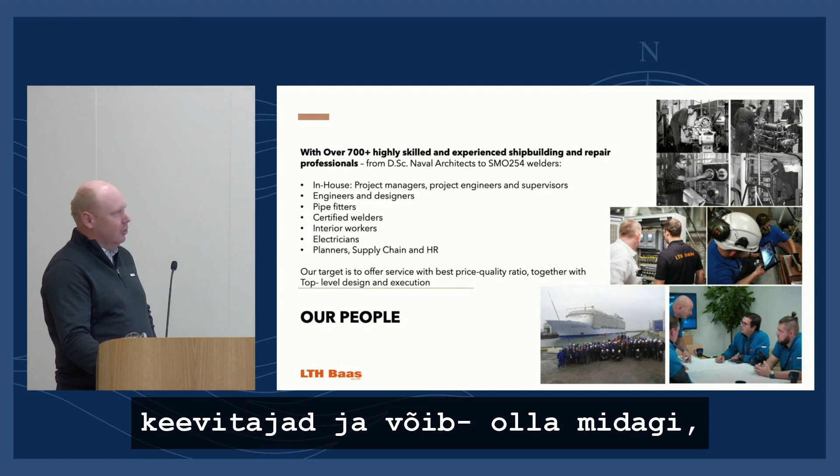So who are our people? Today we have approximately 700 workers, including office team and onboard installation team. We have our own engineering department, procurement department, logistics department, HR department, and of course project management department, including project managers and supervisors, plus our own workers: pipe fitters, electricians, steel fitters, welders. Maybe something that makes LTH a little bit unique in this business is that we are mainly using our own workers, so all these, let's say, 700 people, especially hard worker people like welders and pipe fitters, they are on LTH payroll.

But of course, sometimes we need very specific skills. As an example, sometimes we need divers to do some underwater works. Then we hire this company. We have a very good relationship with one of the Estonian diving companies who have helped us actually worldwide. We have used their services in Malta, Barcelona, Norway, Italy. So everything is actually possible, and there is very high competence in Estonia regarding diving works.

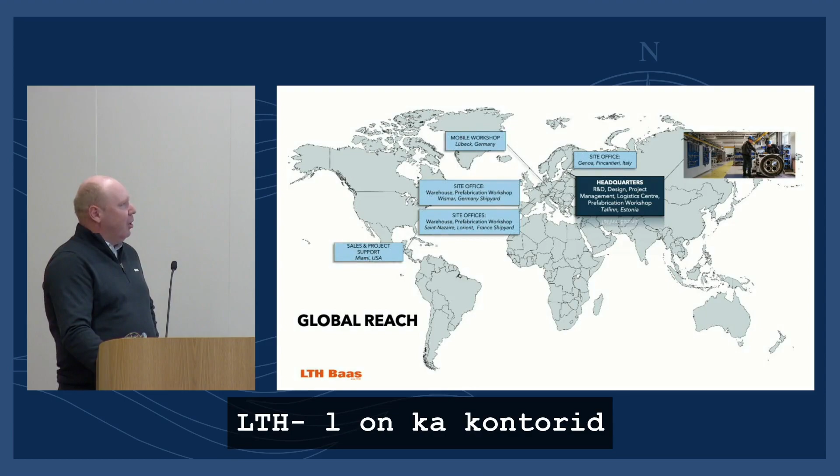LTH headquarters is located in Tallinn, where we have our R&D, design, project management team, logistics center, and also we are mainly using a workshop located in Estonia for the steel works. Plus, LTH also has site offices, mainly in Europe, in the biggest shipbuilding yards in Germany and also in Italy, as you can see on this slide. And also we have sales and project support located in Miami, in the US.

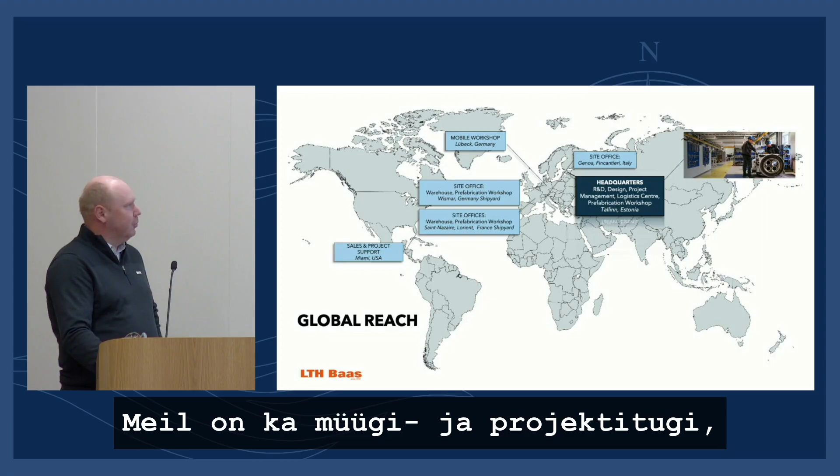We have participated in dry docking operations worldwide: Asia, Europe, North America. Plus, we are doing projects worldwide in operation, and actually this is the main field, or let's say the main activity that LTH is doing - projects in operation, when the ship is operating at sea.

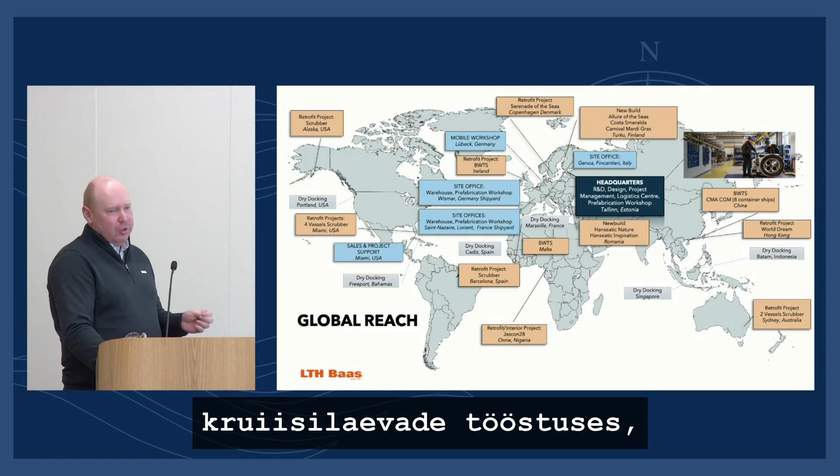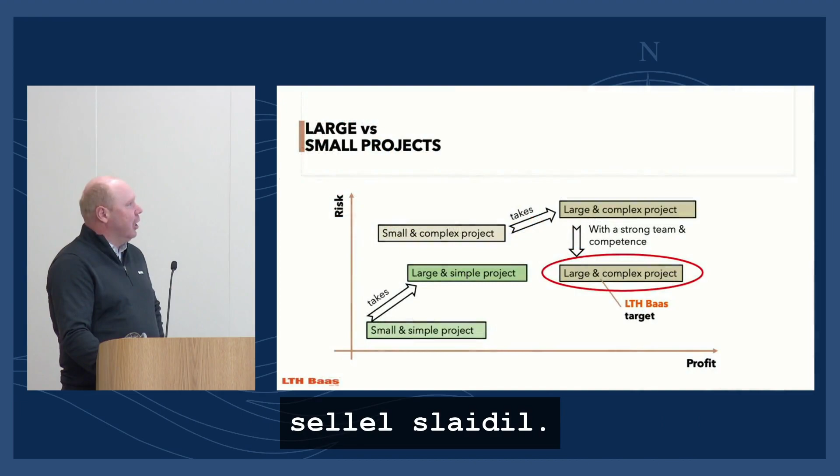So what kind of projects is LTH involved in? I have divided the projects between small and large, plus simple projects, and also between small, large, and complex projects. So what's the difference? The difference is that there is a risk and profit, you can see this axis.

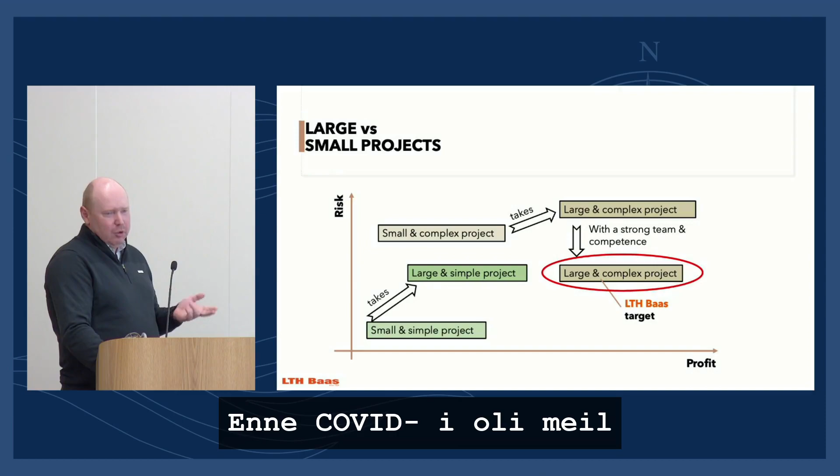When we are talking about small but simple projects, then actually these are not very interesting for LTH, because LTH is a very big company - 700 plus workers, and this number is again increasing. Before COVID we had 1,200 workers, but because of COVID this number dropped. But now we are also growing fast, and let's say our organization is maybe too big - I mean the management is just too big to do the small projects.

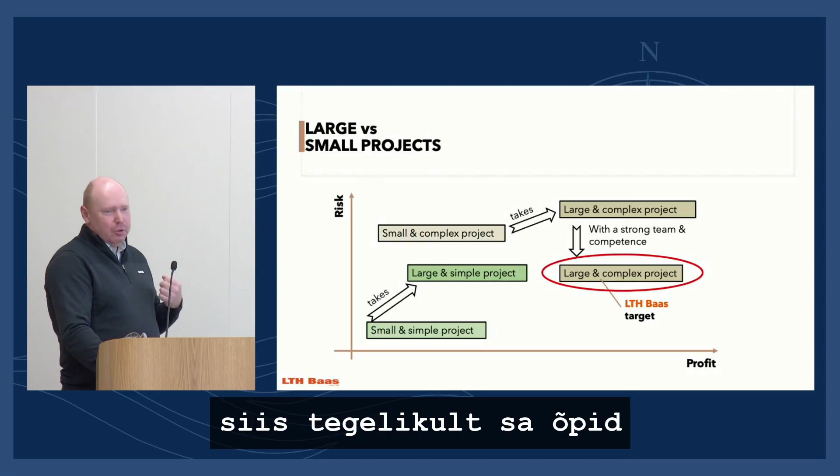But at the same time, you need to do small projects, because if you are doing these projects properly, then you learn something from them, and these small projects help you make a step to the next level. You convince the ship owner that you know what you are doing, and the ship owner is willing to give you larger projects, which at the same time need more competence to do. By the end of the day, if you've done these small projects in a proper way, most probably the ship owner is willing to give you a big project, a big piece of cake.

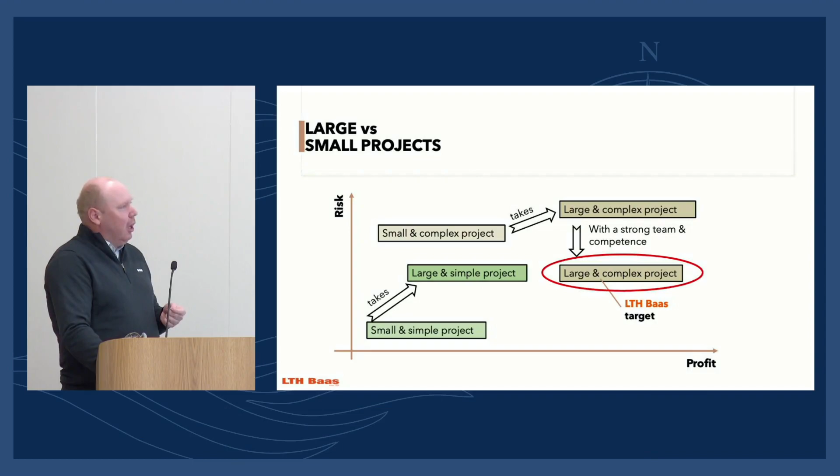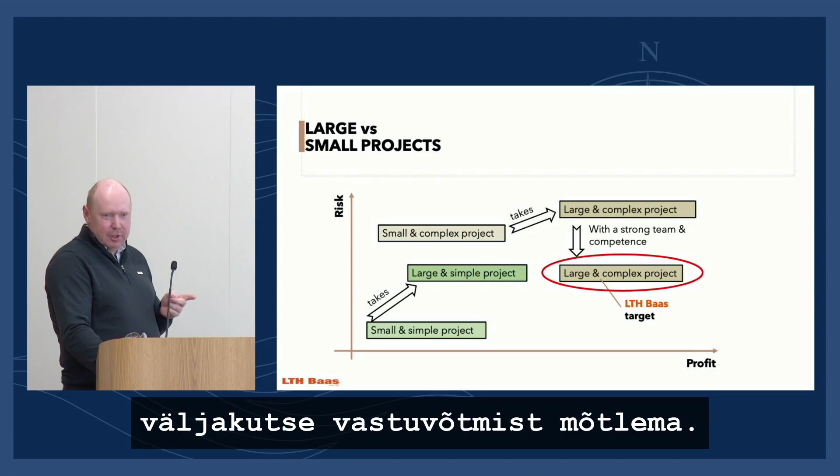But there is a risk if you take this big project, because if you don't know still what you are doing, let's say the ship owner overestimates your skills and your knowledge, then instead of earning money, you can burn the money. So actually you need to think before you accept the challenge - as the gentleman also said, we several times think whether we will take this, so you need to think.

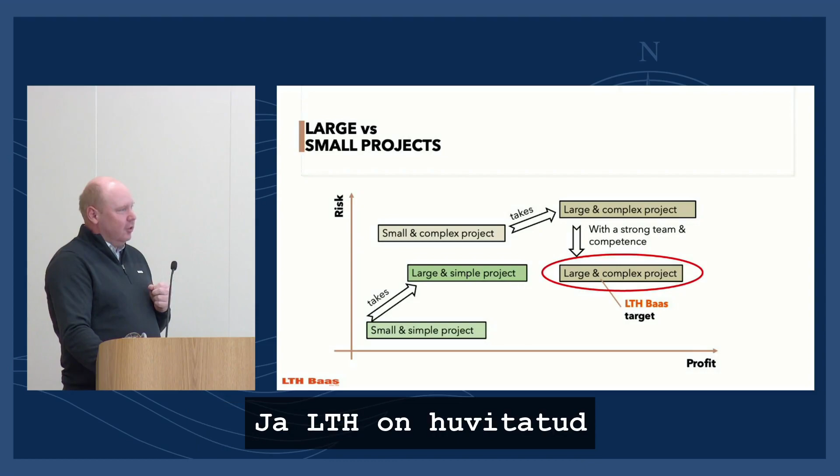But if you have a strong team, if the company is in a good position in terms of financial terms, and you have a strong team who is willing to accept the challenge, then you should take the challenge. LTH is interested in doing projects which are large but at the same time also complex, because not every company is able to do these projects. Everybody can accept the challenge, but by the end of the day, maybe you're burning money, not earning money.

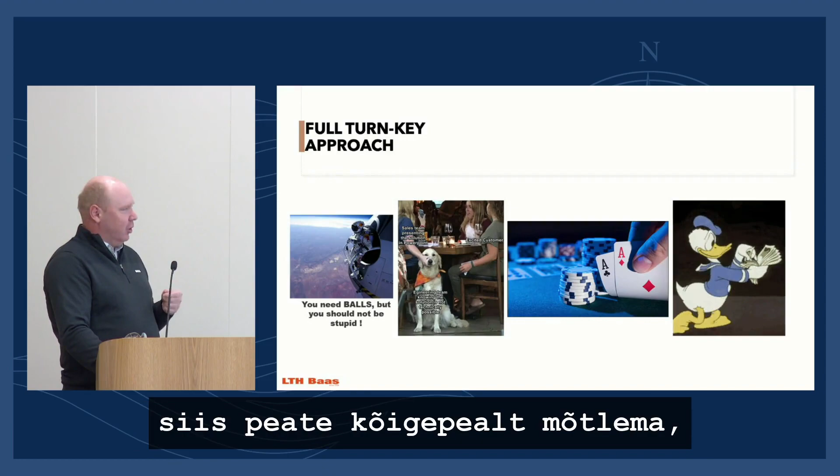If you're talking about big, large projects which are also complex, then first you need to think about what you are doing. You need to have balls, but you should not be stupid. And once you accept the challenge, the next step is to prepare the quotation.

When you are preparing the quotation, you and your sales team need to understand exactly what you are offering to your client. You should not make promises that the project management team cannot deliver.

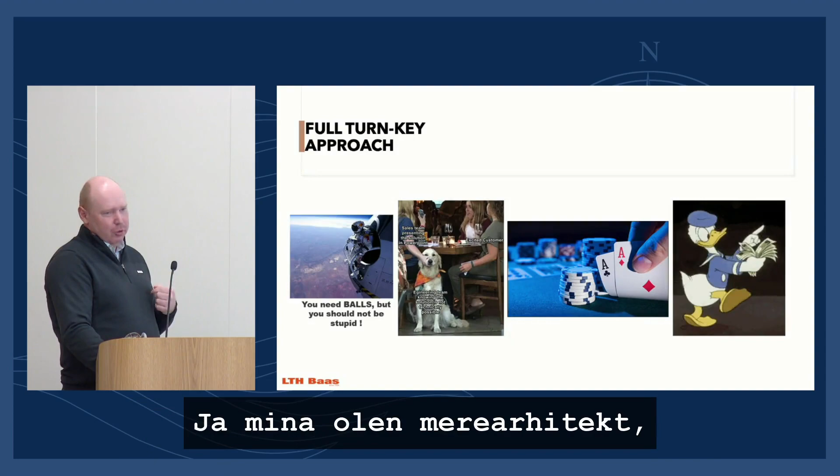For that purpose, in every larger project, the LTH sales team involves the estimation department. There are also engineers, and I am also a naval architect, so I have a very good understanding and wide view of different kinds of technical projects.

In addition to preparing the quotations, I also usually visit the ship when there is a larger project, so I constantly receive feedback from the project management team about what went wrong, what was underestimated, and what needs to be improved in the future.

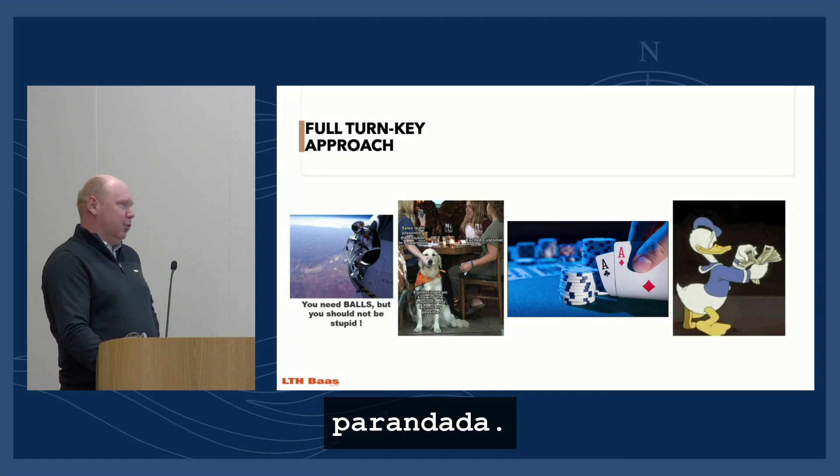So keep your promises and understand what exactly you are promising. Once the client accepts your quotation and you are asked to meet with them to discuss it, this is, at least for me, the most interesting task, because you are sitting at the table.

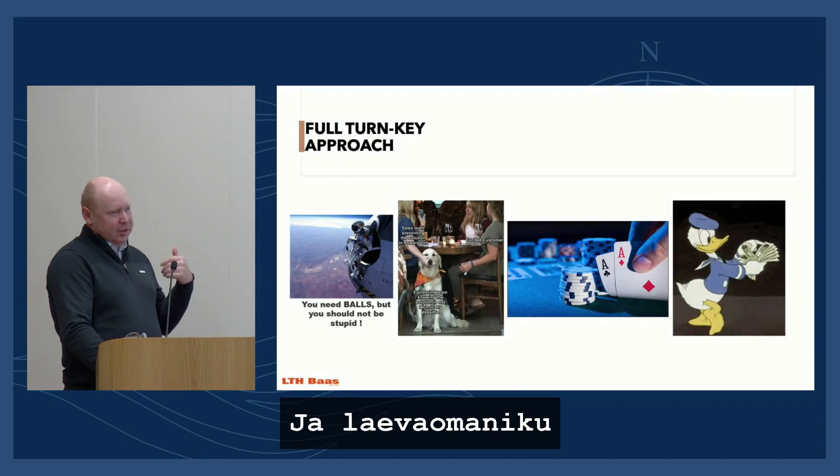You are there, and also the ship owner. The task from the ship owner's side is to reduce the price as much as possible—they just want to squeeze you. Then you need to find ways to protect your offer.

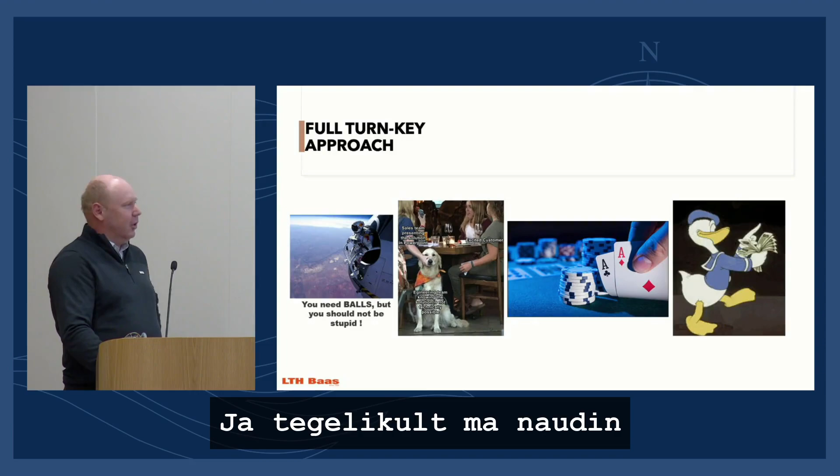You must have very good knowledge and competence to be able to defend your quotation. I actually enjoy this part very much. And if you are able to defend your quotation, you can earn quite good money.

But to earn good money, you still need to understand what you are doing, because you can agree very good terms for the company. But if the project management team, starting from the engineering side, doesn't know what we are doing, you can burn the money that you could potentially earn.

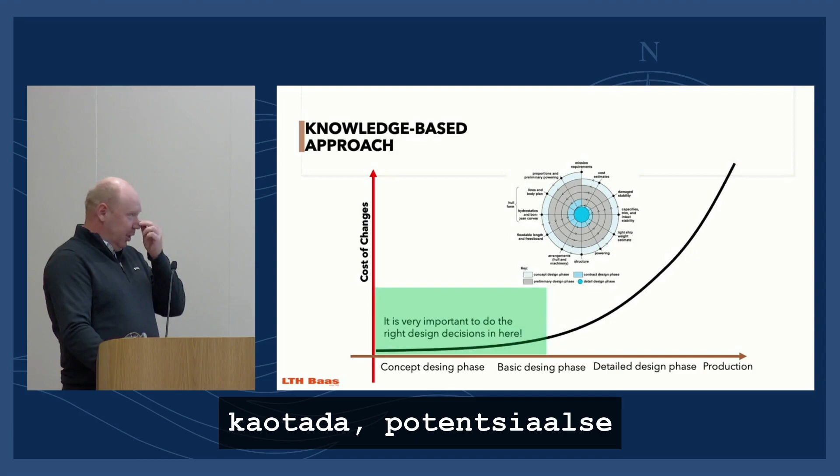On this graph, I'm showing that it's very important to make the right decision at a very early stage of the project, because otherwise, the cost of changes needed if you've done something wrong will increase—the ratio is exponential.

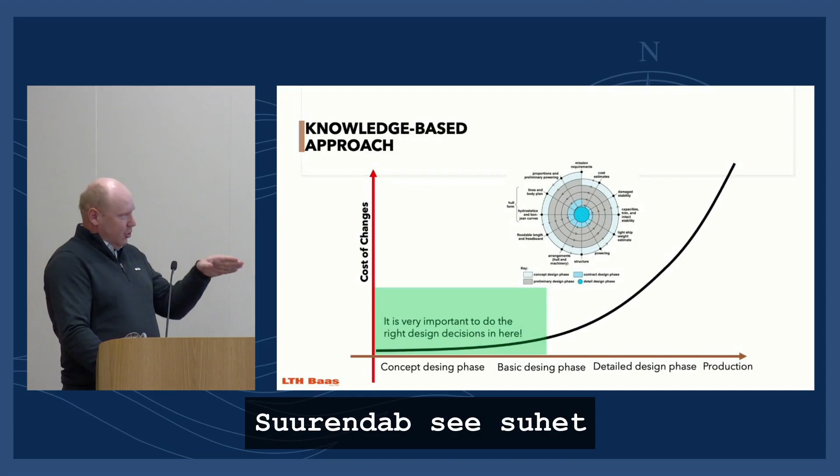If you need to go back and change something in the production phase—say you're already doing installation on board—and then you realize something went wrong at the engineering stage, that's a very big problem.

This example demonstrates that I'm not just telling you this story, but that our clients have noticed this too—that we are doing something differently.

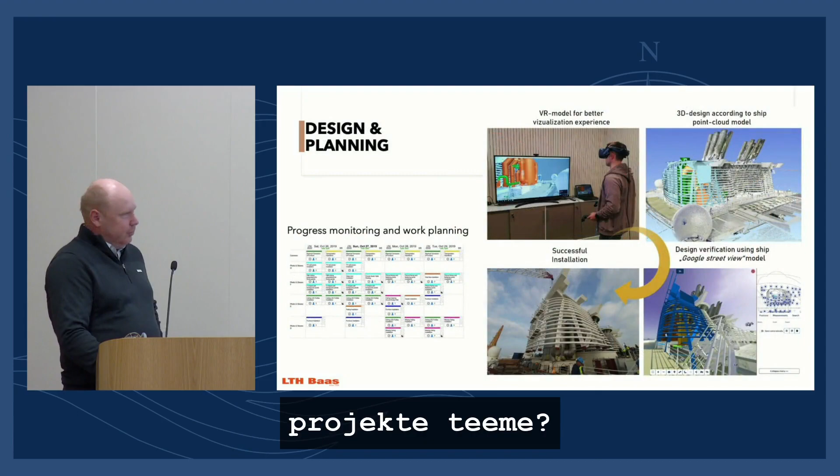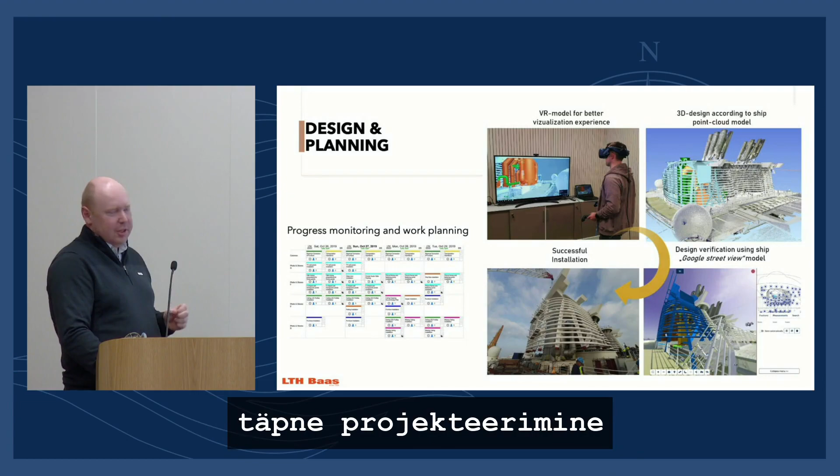So how are we doing these projects? We are using point cloud-based design, but of course this is for larger projects. For small projects this doesn't make sense because it's simple and there's actually no time for it. But this process, including 3D scanning, allows us to do very precise engineering, and as a next step from engineering you can plan the project very accurately.

You can buy the materials with the minimum required spares, and plan your amount of workers very precisely.

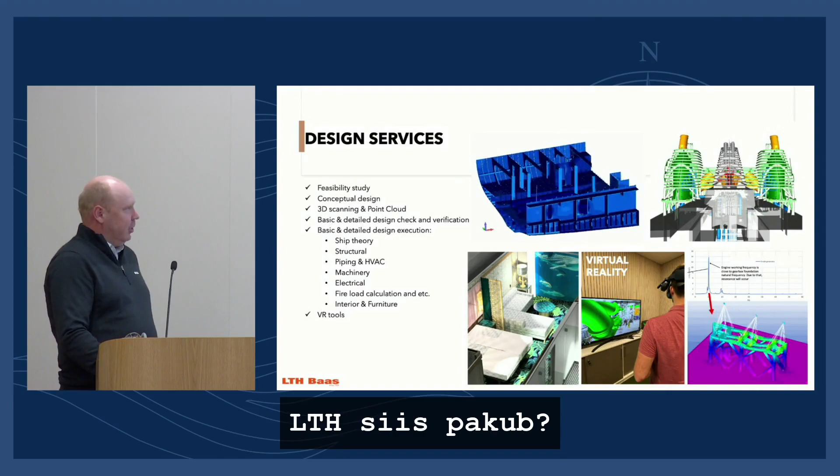So what kind of design services does LTH provide? We can start from the feasibility study. For larger projects, we already include 3D laser scanning in the feasibility study, which is this point cloud. And of course, we are able to prepare all the basic design and detailed design drawings.

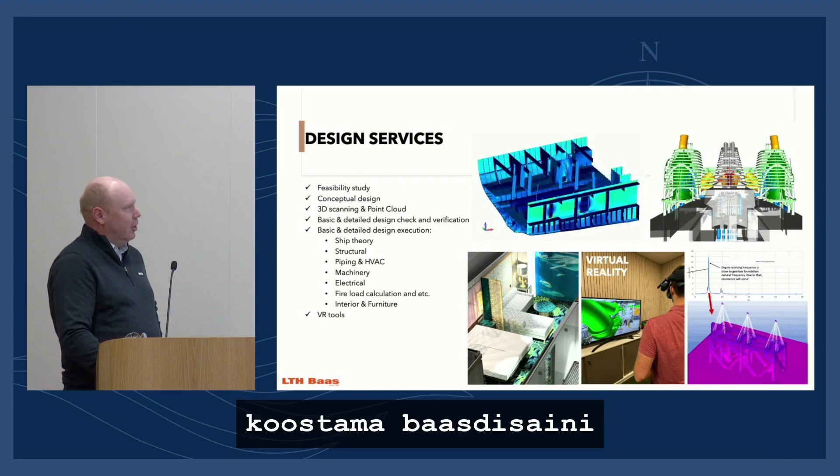For some of these tasks or disciplines, here is the list of disciplines that we can do: ship theory, structural, piping, etc. For some specific tasks, we are using also our partners, but of course we are supervising what they are doing, and we are working like one family.

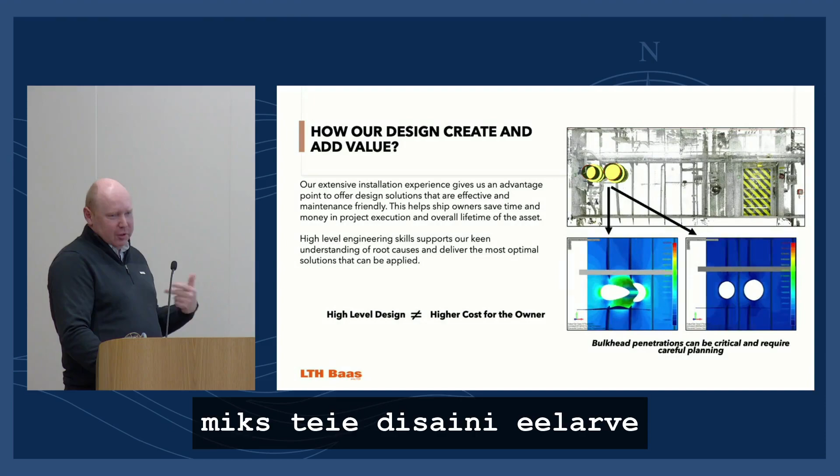How can our design create added value? There is always discussion about why the design budget is so big. But I always tell clients that if you put €1 into engineering, this will actually earn you back €3 from the installation side. This is like a rule of thumb.

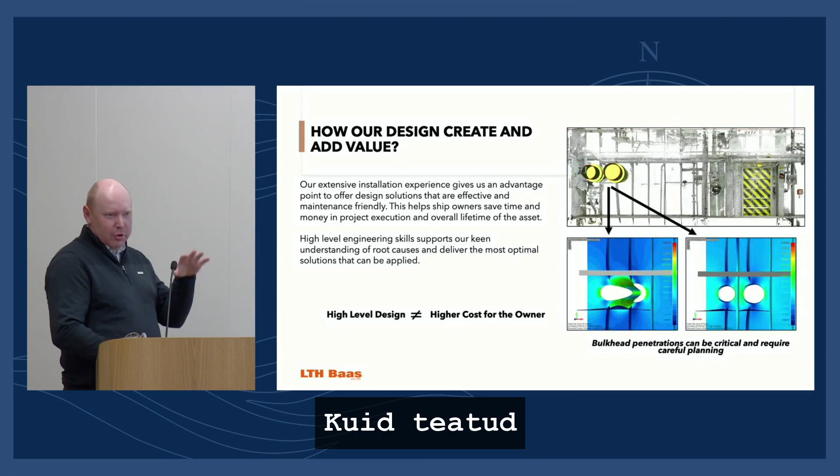Of course, you can put endless money into design, but at a certain level you need to invest money in engineering because this actually saves you money. So you should not look at the cost of engineering separately. You need to look at the total project cost, engineering plus installation. There's no point arguing that if you reduce the engineering cost, your price is better, because if you reduce the engineering price, we're not able to do the project with the same money. We'd actually need to increase the installation budget.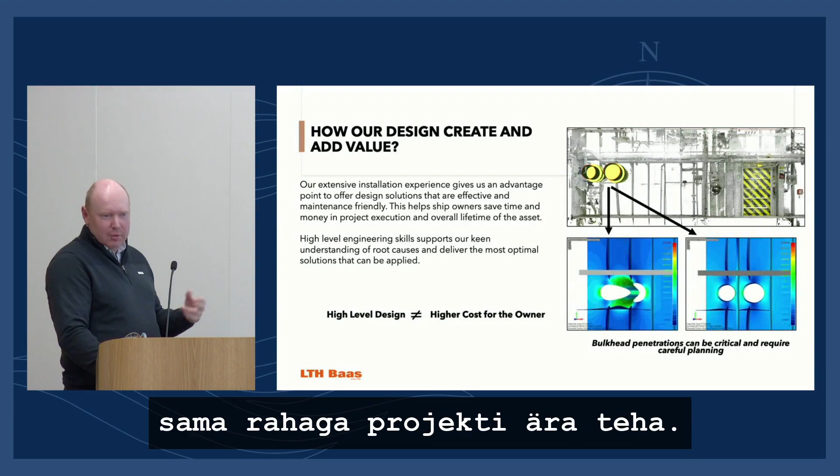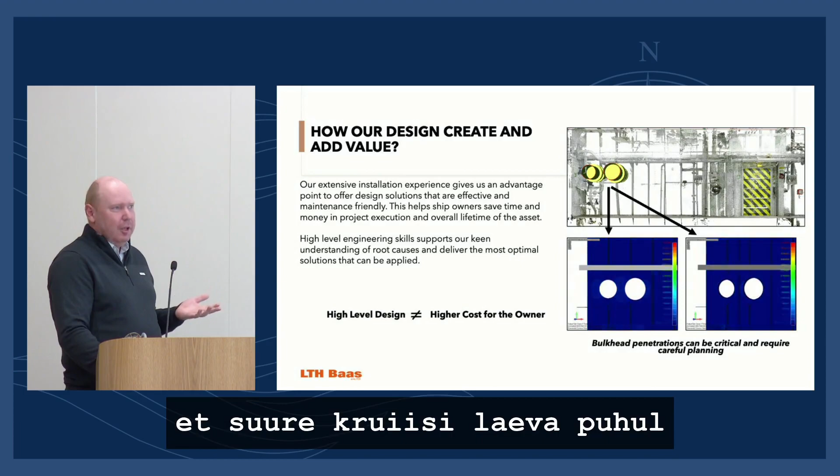Here is an example of bulkhead penetrations, where we normally do finite element analysis. Most of you can think, if you're considering a big cruise ship, 300 meters long, 40 meters wide, 17 or 19 decks, and you want to cut a 400 diameter hole in one of the transversal bulkheads in the machinery room, what can happen? Because the ship is made of steel and it's so big, but actually what can happen in reality is that this bulkhead can buckle elastically, locally.

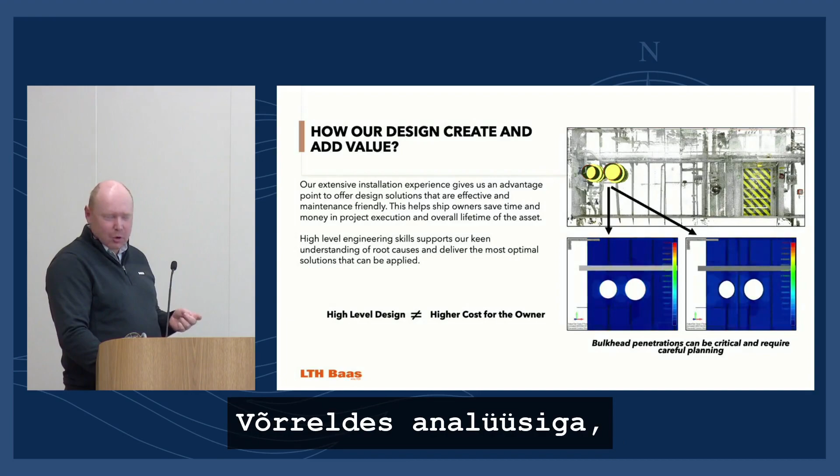What would it cost you to fix this later, compared to the analysis one of your engineers can do? This analysis was done in just one day, but compared to the cost if something happens on board, this cost is nothing. And if you already have your design model in 3D, you can create such an analysis quite fast.

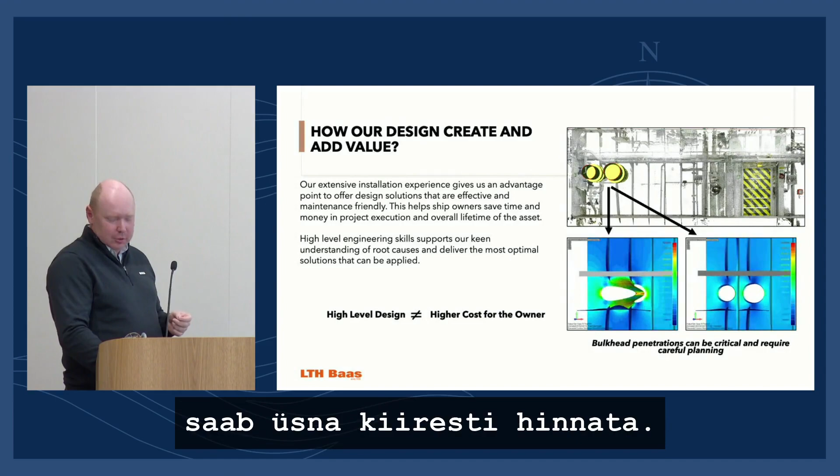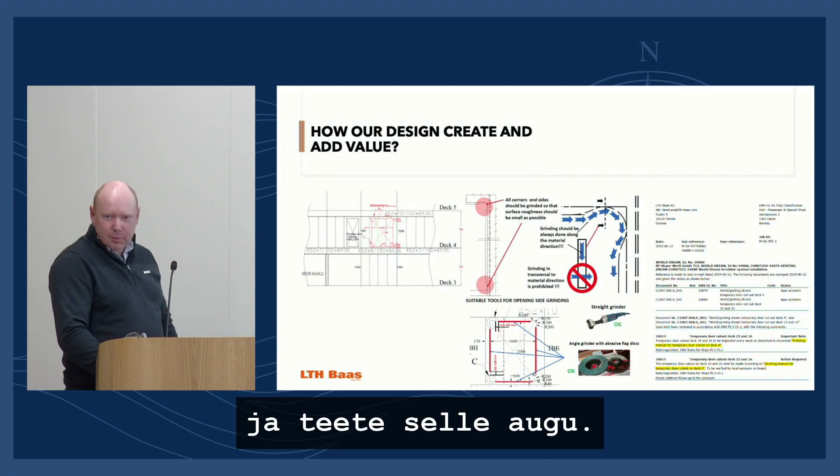The next example of how design can help: we had a project on board where there was an urgent need to make a cutout in the ship's longitudinal bulkhead. But it's not so easy to do. From a technical side, it's very easy to make this drawing, three lines, and just take a plasma cutter on board and make the cut. But since it's a longitudinal bulkhead, it can buckle elastically, or cracks in these corners will appear very fast.

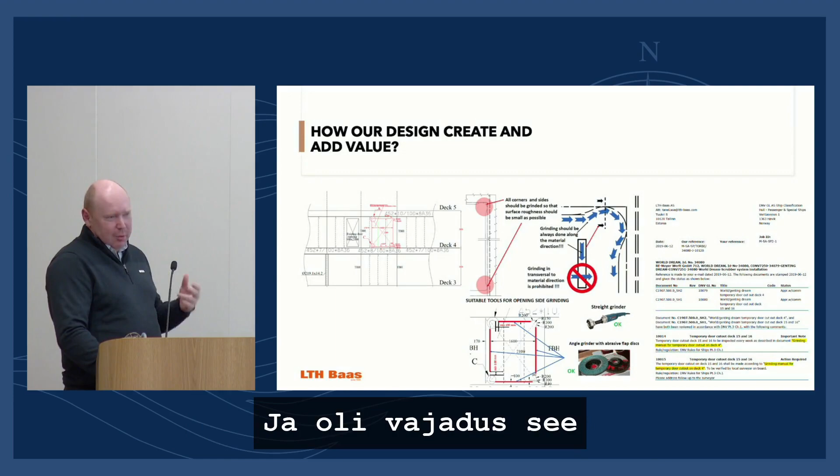So you need to do this cutout very properly. You need to prepare the surface, make the cutting in a proper way. There was a need to get approval within one day, because otherwise our workers had no possibility to proceed with the work they should do. And how do you receive this approval from DNV, who was the class society? It's very tricky, because this approval process can normally take like 30 days.

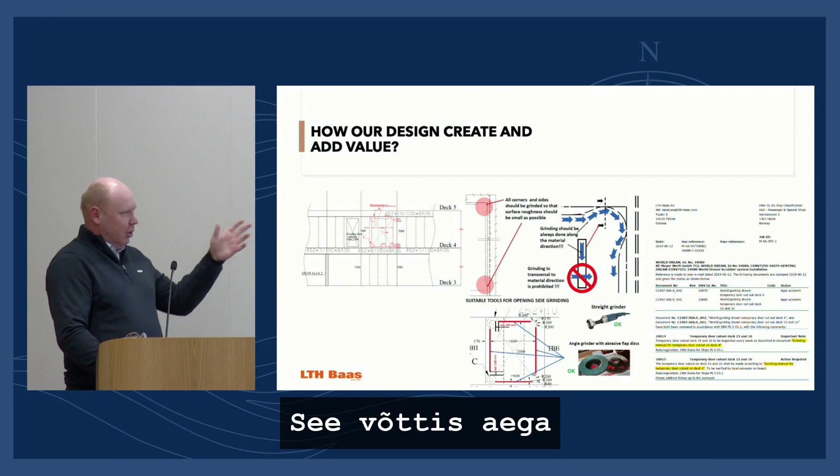So what we did, we made this drawing fast, and also prepared a grinding manual showing how you need to prepare the surfaces after the cutout is done. This took something like half a day. Then I submitted these documents to DNV, also told them it was an urgent need, and after one hour I received a call from DNV.

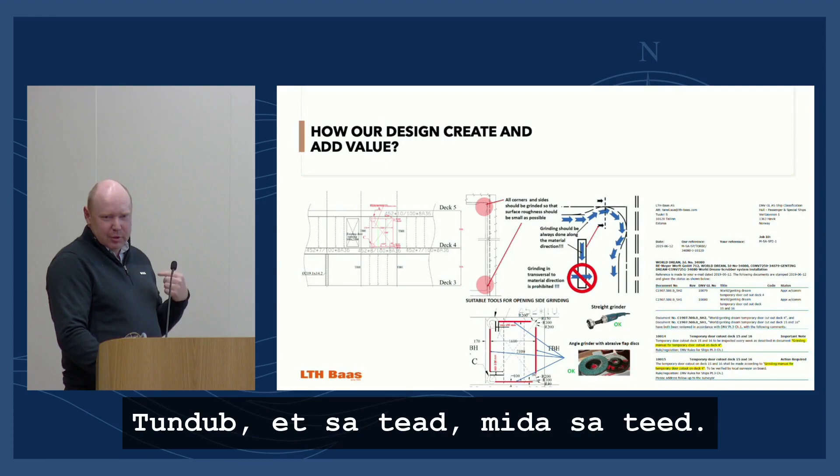They asked me who prepared this grinding manual, because it was on a totally different level, and it seemed like I knew what I was doing. I mentioned the name of one of our engineers, our head of design, and they said, okay, I know this person. He's a doctoral degree naval architect.

He told me, okay, you need this urgently, but one hour is okay because I need time to prepare the approval document. I said, of course, we can wait this one hour, no need to do it faster. So this demonstrates that if you have the competence and good engineers, you can achieve a lot.

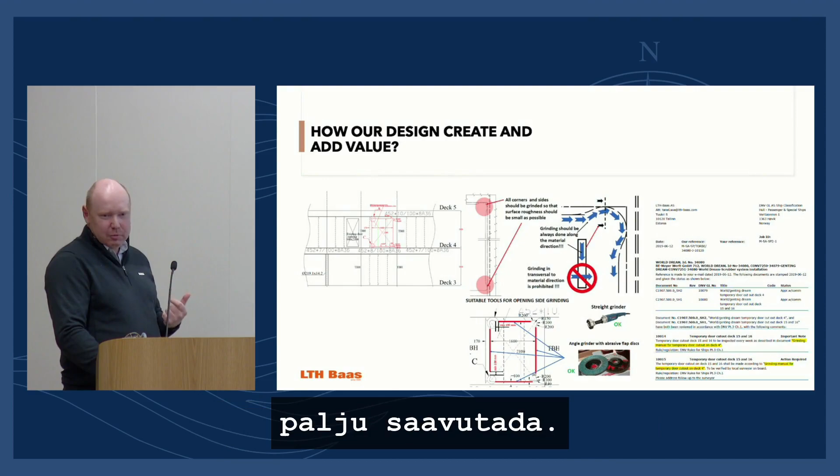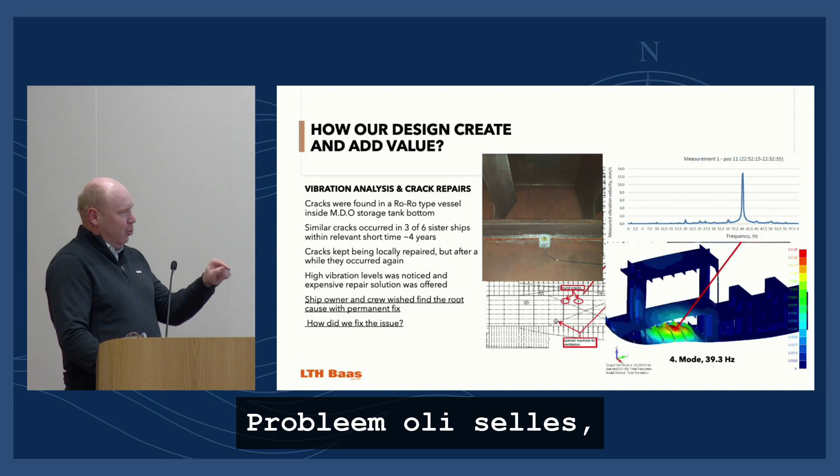Here is another example. A ship owner called us because they had a huge issue in one of the marine diesel oil storage tanks. The problem was that cracks kept appearing in the bottom plate of this tank. They had tried to repair it several times already, but the crack kept coming back. They were in contact with the shipyard, because there was a plan for the ship to go to dry dock in two weeks or so.

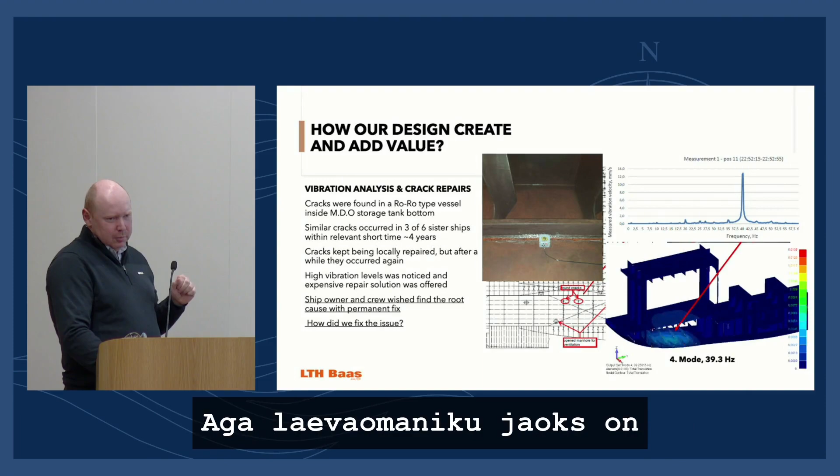The money the shipyard asked for was something close to one million to repair this issue. But for the ship owner, one million is very big money. And the shipyard didn't give any guarantee that this would fix the issue. So you're paying one million but don't actually know if this will fix the issue or if the same problem will come back. So what they did was order a finite element analysis from us.

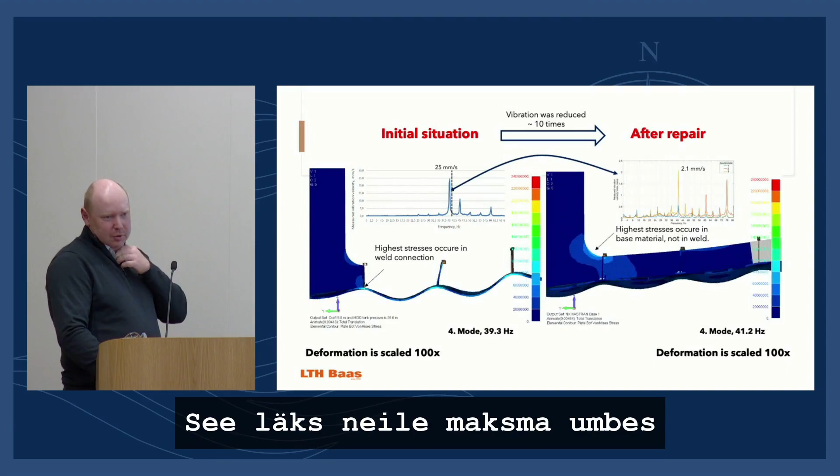This cost them something like 10,000 to 15,000. This analysis clearly showed that there was actually no need for such a major conversion. And by the end of the day, this work cost the owner less than 10,000 euros.

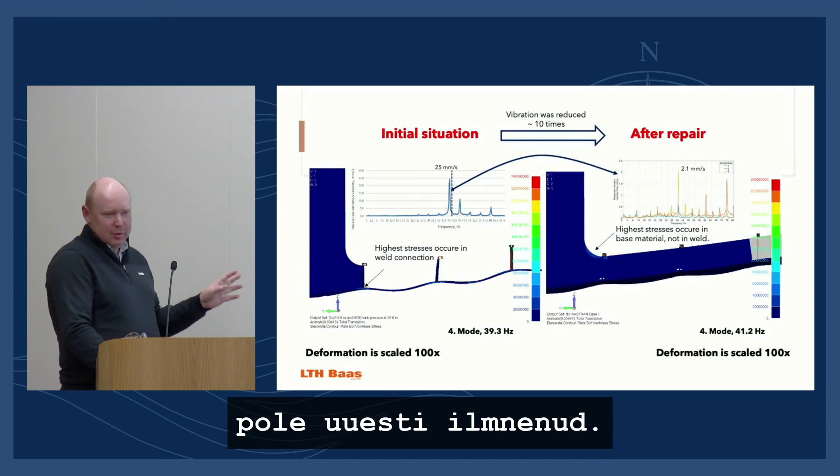And now this ship has been operating after this dry dock service for more than, already close to 5 years, and no such issues have appeared again. So this also shows it is wise to invest the money in the design.

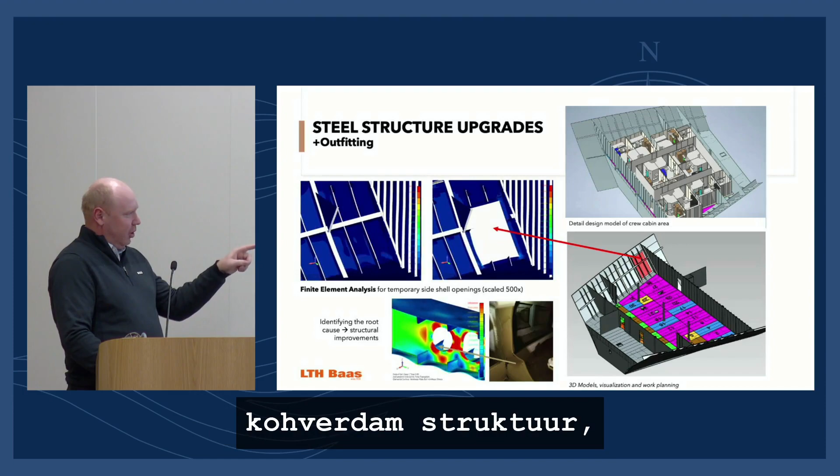And also one more example. There was a cruise ship deck structure number 1 - maybe this is a little bit familiar for Sven from Foreship. What was the problem there? The problem was that under this deck 1, there was a cofferdam structure, and this cofferdam structure, as you can see on the picture, was locally deformed. And actually the ship owner didn't know what the problem was, why it's deformed.

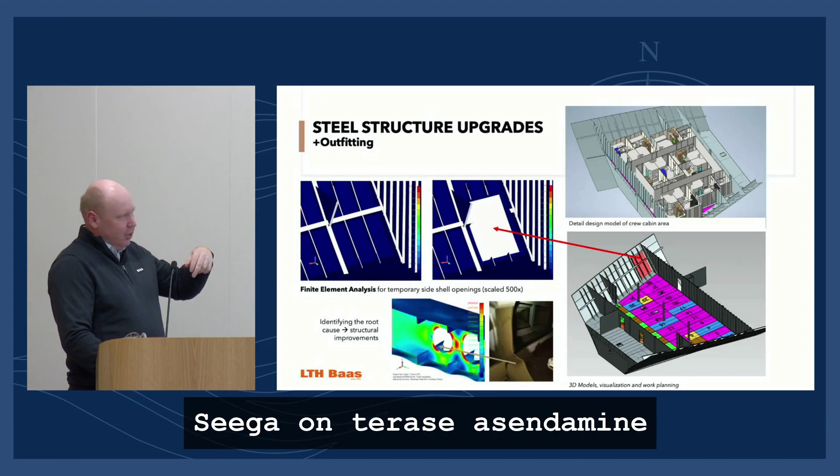The dry dock was coming and they wanted to repair this deck, but they didn't want to do this without investigating the root cause, because otherwise you will just replace the steel, but this can come back very soon. And you have also, as you can see on the picture, cabins installed on top of this deck, so it's a major conversion to replace the steel because this interior part is involved.

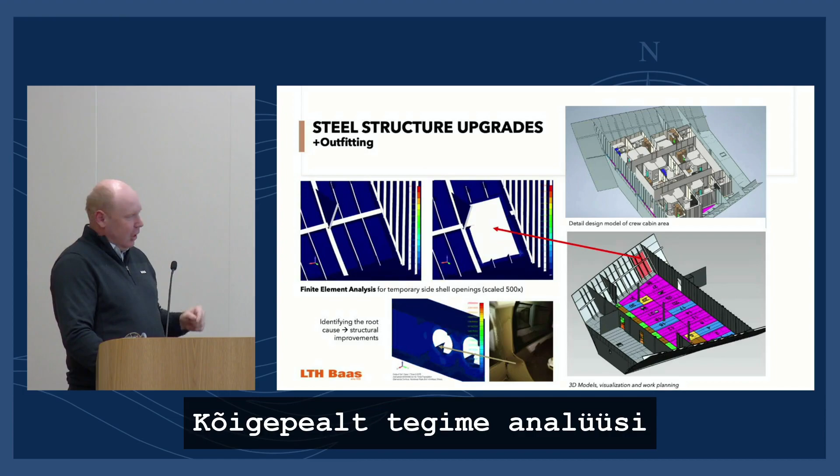And also the ship owner contacted us. They knew that we have very good competence in structural analysis, and this was actually the main reason why this work was given to us. Because first we made an analysis and we showed them exactly what had happened and how to fix it.

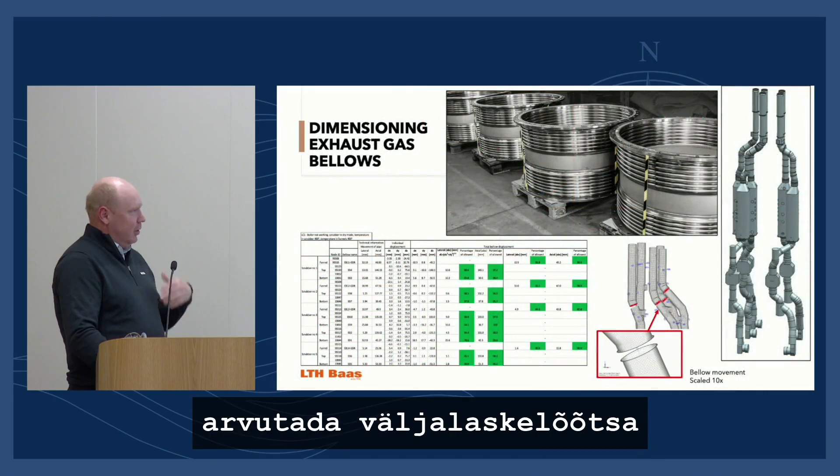What is also, let's say, one of the knowledge that LTH has is that we can also make the analysis for exhaust gas systems, I mean for anchorage points and vibration mounts. And also we can calculate and dimension the exhaust gas bellows.

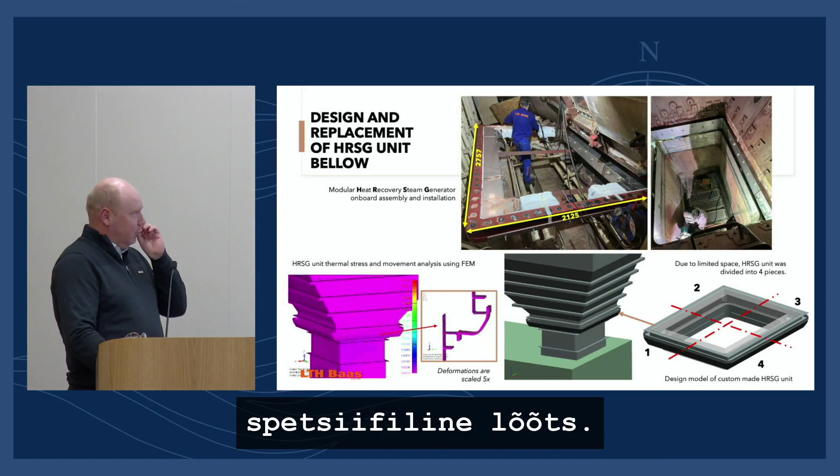Also the ship owner knew that we have this competence. What was the problem, looking from the ship owner side, is that they had a very specific bellow installed on the exhaust gas system. The ship was quite old, 20 plus years. And actually the supplier who delivered this expansion joint in new build, this company was not anymore in the market. And the size of this bellow was so big that to transport it to the installation location was more or less mission impossible, because you would need to destroy the ship to bring this to the installation location.

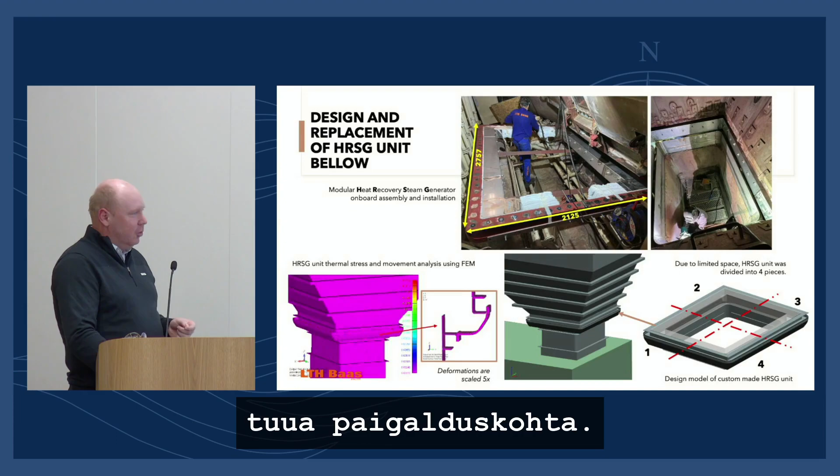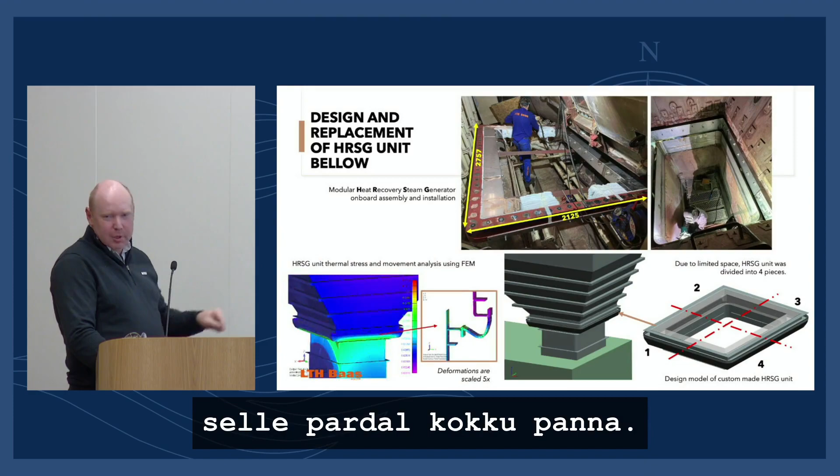But how to do this project if you need to cut the bellow? The ship owner was searching for a supplier, already something like 1 year, to find someone who can produce this bellow in pieces and assemble it on board. Actually LTH Baas was the only company in the world able to do the proper engineering to build this, of course using subcontractors, to build this bellow in a workshop in pieces, assemble on board with our own workers, LTH workers, do the commissioning, and this bellow has now been working already about 2 years on board without issues, and now we are doing the same work for 2 sister ships.

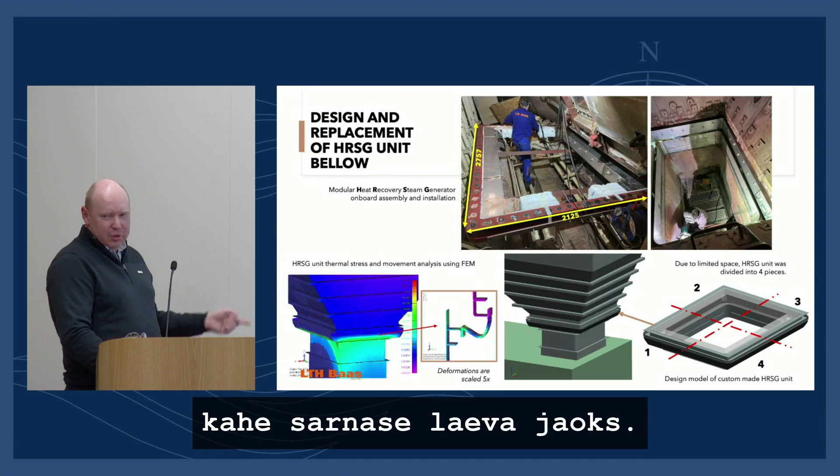But this also demonstrates what you can actually do if you know what you are doing, if you have very high competence in-house, and also the owner trusts you.

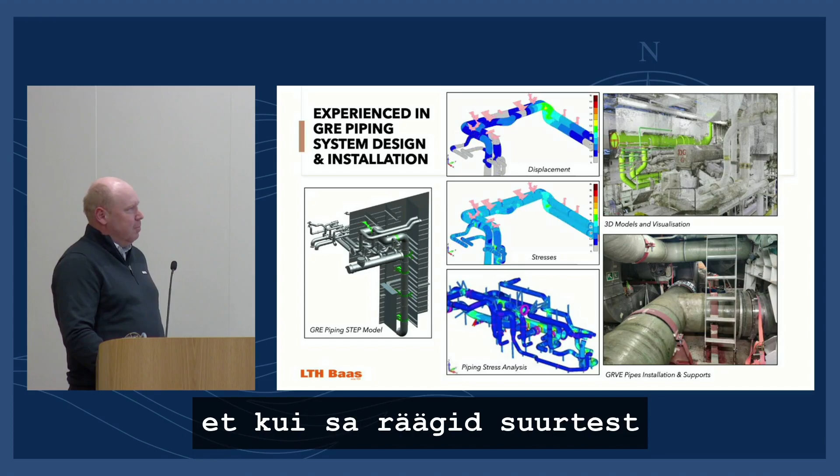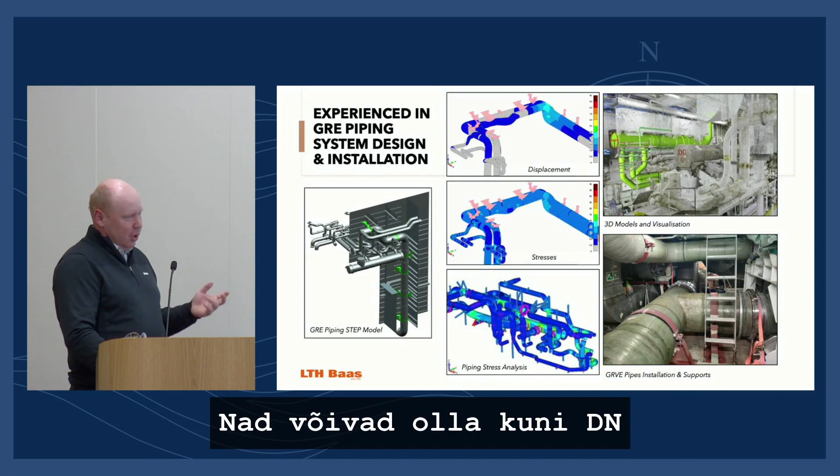What we are also maybe doing differently compared to our competitors is that if you're talking about large projects, scrubber projects, then there are hundreds of meters, if not kilometers, of GRE piping, which is like plastic pipes, let's say. But what makes it challenging is that if something will happen to this pipe, it will happen very fast - there will be like an explosion. And as normally these pipes are huge, it can be up to DN 1000 in diameter, so just imagine if something happens with this pipe and the water comes out.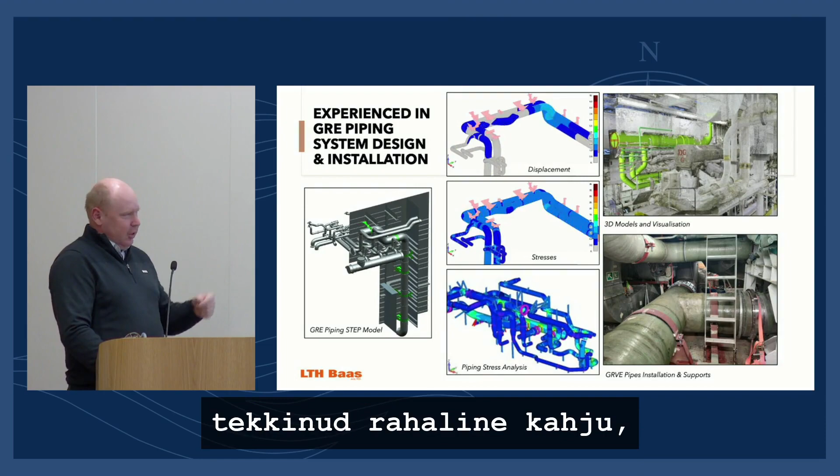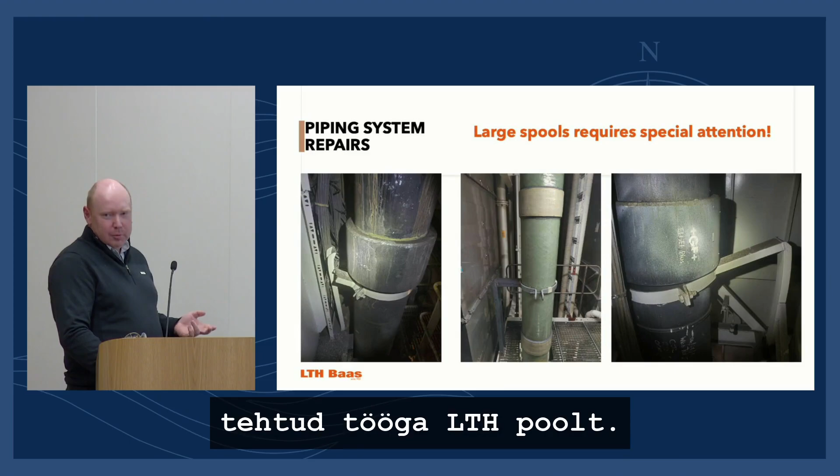So actually this can create very big damages. And there are actually some cases on board cruise ships where the cost of the damage that such pipe failure caused was more than 1 million. But what we are doing, we are always doing finite element analysis for these piping systems, which helps us design a proper supporting system for these pipes. And actually now we are in contact with several cruise liners who are asking for repair works - these projects that were not done by LTH, to fix the problems. And we are actually receiving more than we can do, let's say.

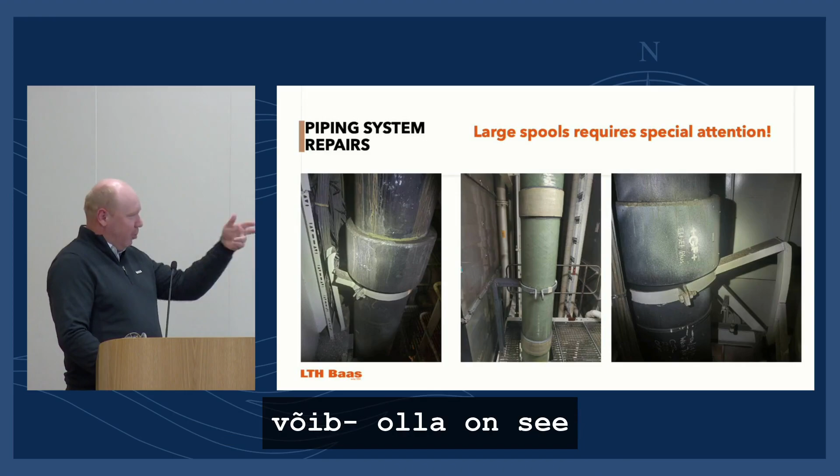And here you can see some good examples that demonstrate if this design, and also the installation on board, is not done in a proper way. For a professional, it's already obvious if you see these pictures that these supports are like chicken legs - this cannot last, actually. But still, I would say like 80-90% of our competitors, for some reason, are still installing such supports.

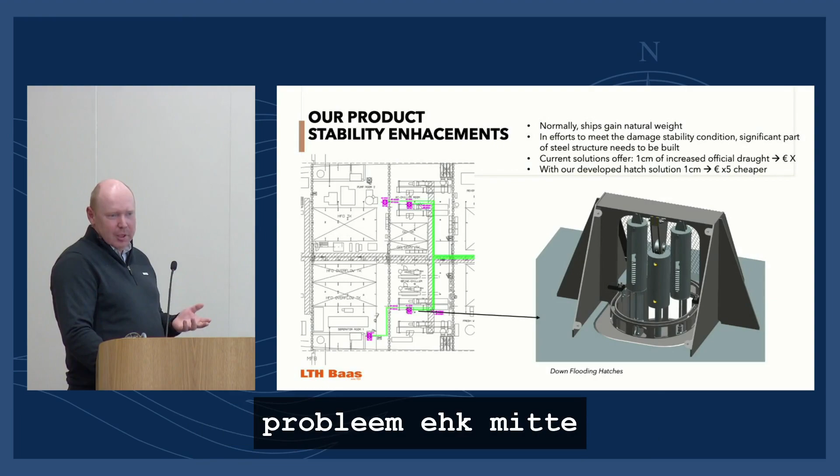So what is LTH's goal? Actually, LTH's goal is to start developing our own products. It means that a ship owner will contact us with a bigger problem, not just with one ship, but maybe a series of ships, and some kind of solution is needed. Here is one example.

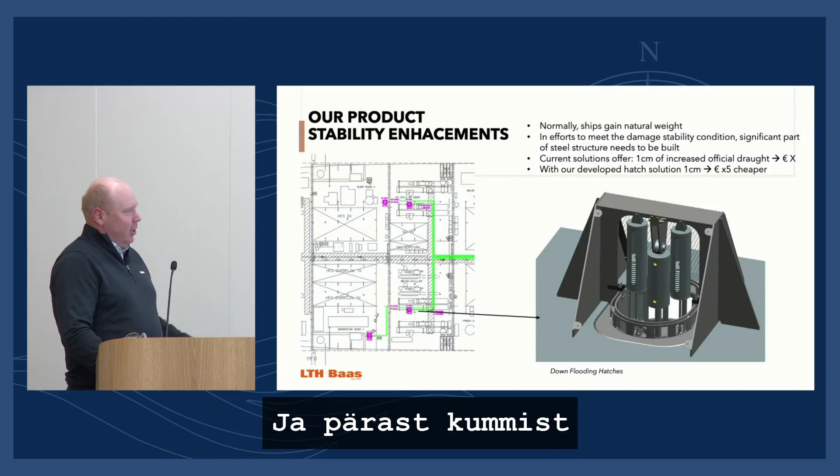On board this cruise ship, and there were more cruise ships in the same series, a scrubber was installed. After this scrubber installation, because the light weight was increased significantly, and this ship's stability condition was already close to the limit before this scrubber project, there was a need to do something with ship stability, more precisely, damage stability.

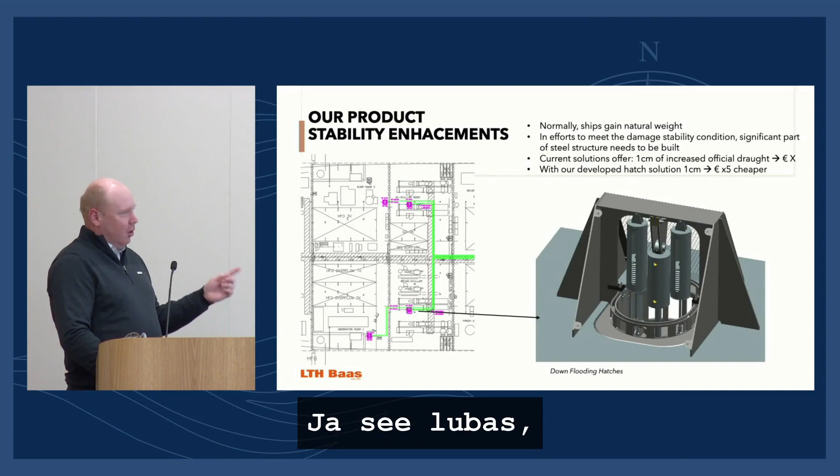And for that, what we did together with the ship owner was develop the concept of downflooding hatches. This allowed, if there is damage from collision or grounding, you can lead the water that is in your machinery room to the double bottom, or from the double bottom to the machinery room. That helps improve the damage stability because the center of gravity will be reduced, so the ship will not collapse.

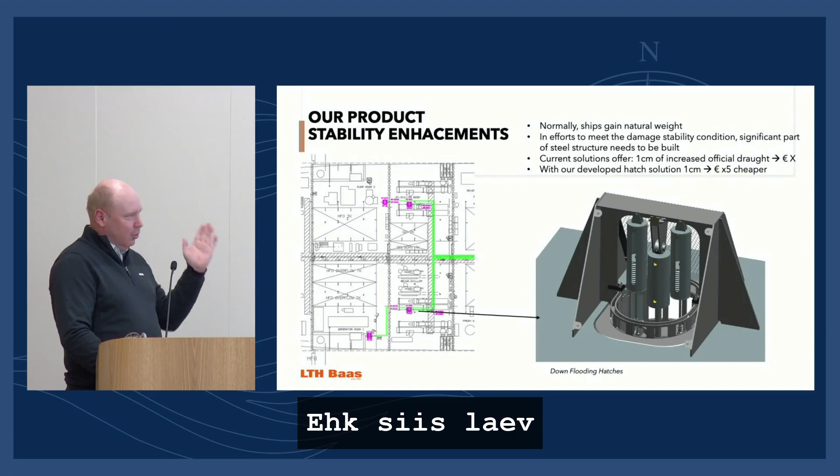But what was also important was the project cost. For previous similar projects, stability is quite often a problem, especially if the ships are old and you need to do something to improve the stability. The cost to improve the stability for the previous project was something like 1 million.

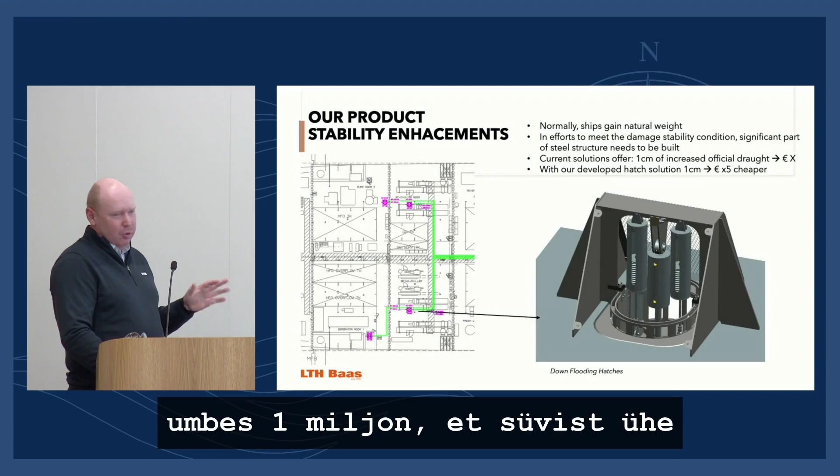To increase the draft by 1 centimeter. For this project, there was a need to increase it by something like 5 centimeters or so, and the owner didn't have the money to do this.

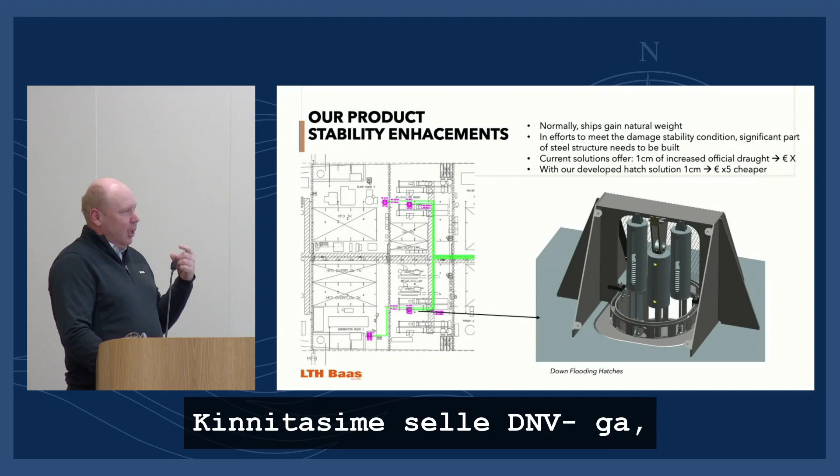But together with the owner, we developed the concept. We approved this with DNV, which you can also see here. All these spot tests were also approved by the Malta flag, which is actually not so easy to get approval for, especially when dealing with ship stability.

But by the end of the day, we were able to do this project 5 times cheaper. So this was significant cost saving from the ship owner's side.

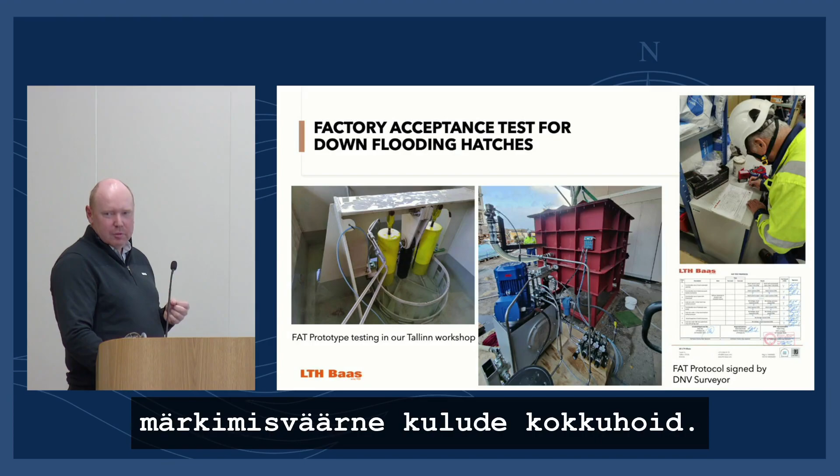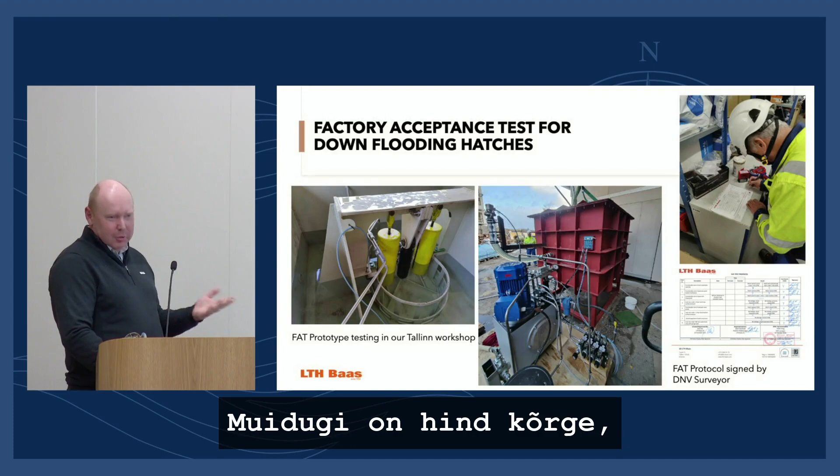Actually LTH was the only company interested in developing such a product together with the ship owner. All the others said, you have MacGregor, you can do this in a traditional way, of course the price is high, but this is what you need to do. What is the point of developing a concept to make a new product? But looking from the ship owner's side, as I said, there was a very big advantage.

Last but not least, I would like to bring your attention to one of the projects we are having at the moment. This is the HEMOS project. HEMOS means Holistic Energy Management Optimization System. LTH received an EU fund grant from Horizon Europe to do this project together with a consortium of companies. We are the leaders, this is our idea, but in this consortium there is one equipment provider from Sweden, Inepact.

Also the University of Napoli from Italy is involved, and we have for the paperwork the Baltic Innovation Agency, located in Tartu. And what is the goal of this project? It is to make a digital twin of the ship's energy system.

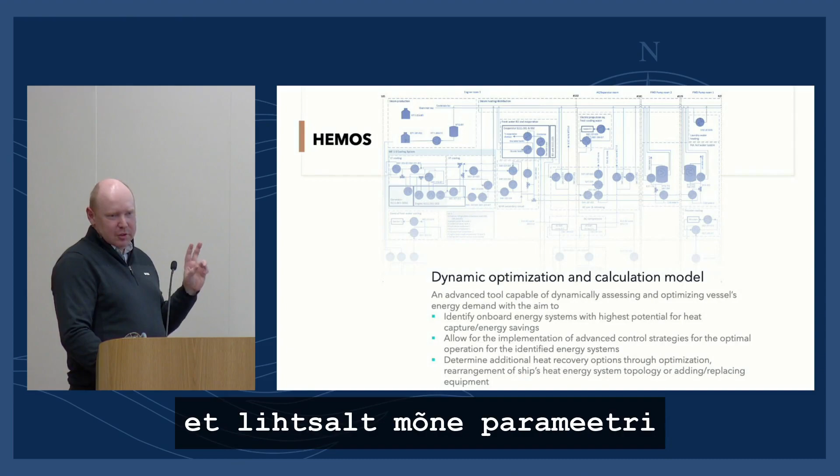To investigate mainly the waste heat, how to use the waste heat. This digital twin allows us to test — if you change one parameter, you can see what will happen with the other parameters. Sometimes our research so far shows that just by changing some parameters, and also the way you're operating the ship's energy system, you can have 1-2% energy savings already, just by optimizing the system without adding any equipment.

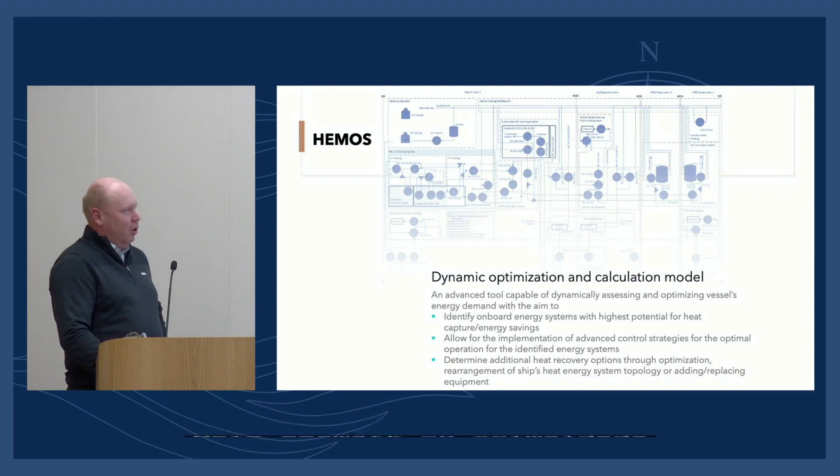So what is our goal? Our goal is to allow ship owners to save up to 14%. Our analyses are showing that it is possible, not for all types of ships, but for some it's definitely possible.

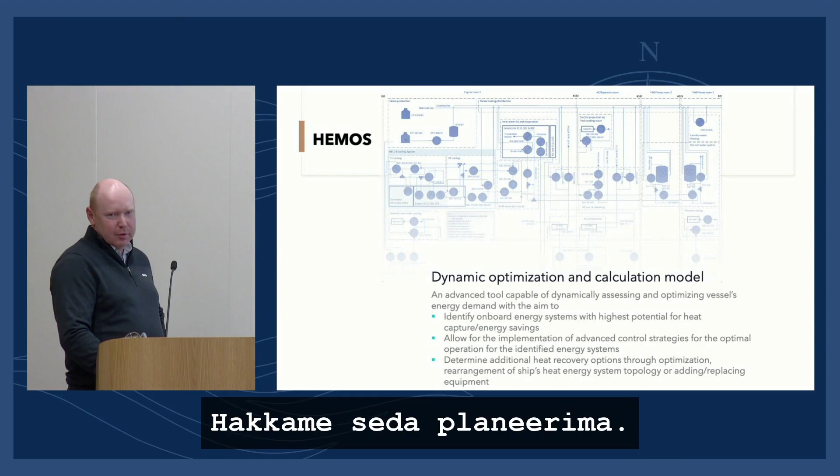At the moment we are at the stage where this theoretical research is more or less completed, and we are entering the installation phase. We are starting to plan this, selecting exactly what equipment we will use for this ship — this is one of the Royal Caribbean ships. I believe next year we will already have full-scale test results from this project.